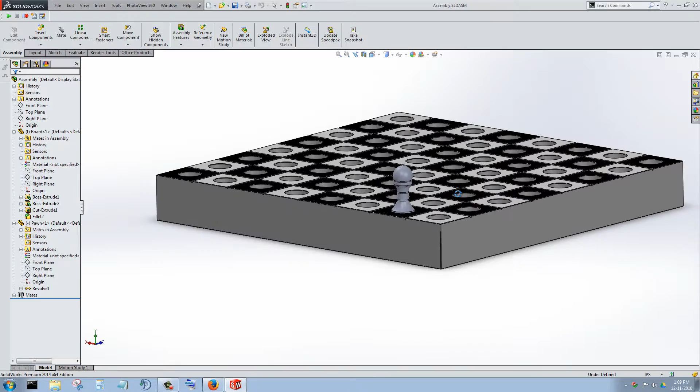Okay, let's make the Rook. Let's open up the assembly. Something I can do to open this pawn up is just right click on that and go into open part. It's a nice shortcut.

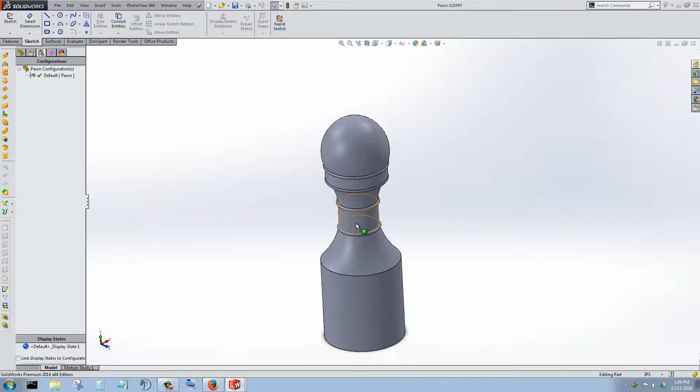As I said before, I'm going to use this pawn as the basis for the Rook. So there's a couple things I can do here. I can create another configuration, and we're not going to do that. I will use configurations of pawns to create the two color tones of the opposing sides, so there will be a white and a black, or brown and light tan, or what have you. Two contrasting colors.

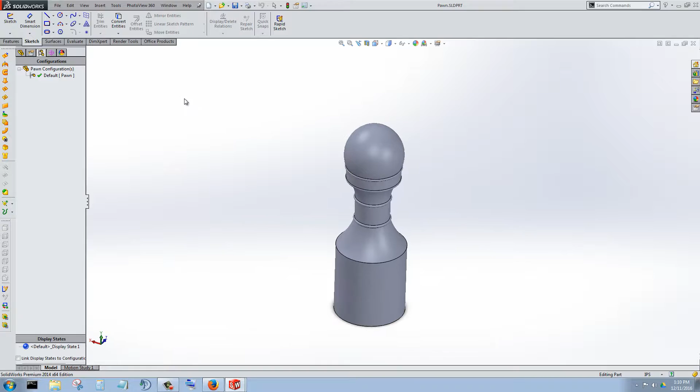But what I will do is simply, because the basics of my Rook is here, go File, Save As, and this is very important to read through these. Every time you do this, if you have this part open in an assembly, it'll give you this option. The first one just saves this part to a new file name, and then the assembly will now reference the new part with the new file name. Don't want to do that.

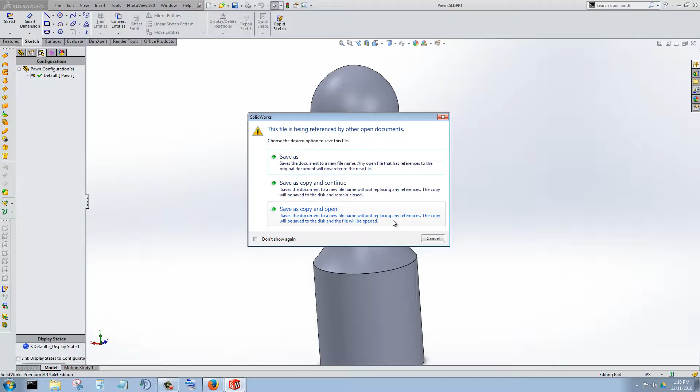Save as a copy and continue will save my pawn as a Rook, but I'll continue to work in the pawn file. Don't want that. We want to save as a copy and open, saving this as a Rook and then opening that Rook file. So save as copy, and we'll call this Rook.

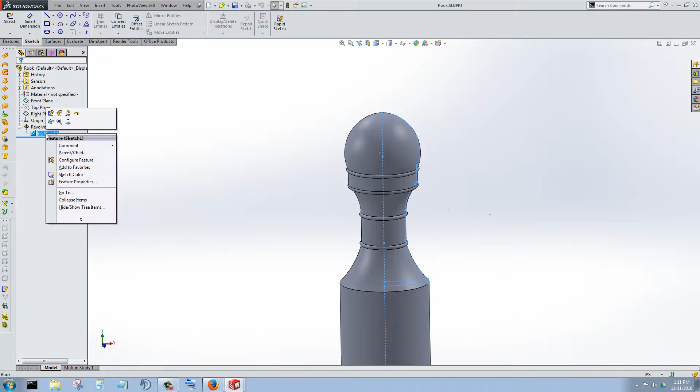Okay, so this is Rook. So I can edit this, and I don't have to worry about this impacting my pawn file. Everything looks just the same as it did on the pawn file. So we'll just edit that sketch.

I know I'm not going to have this arcing head on a Rook, so I'll just sketch out what I think a Rook head might look like, and I might raise the overall height of some of these other geometries, elevating the entire Rook completely, and probably keeping this foot the same distance.

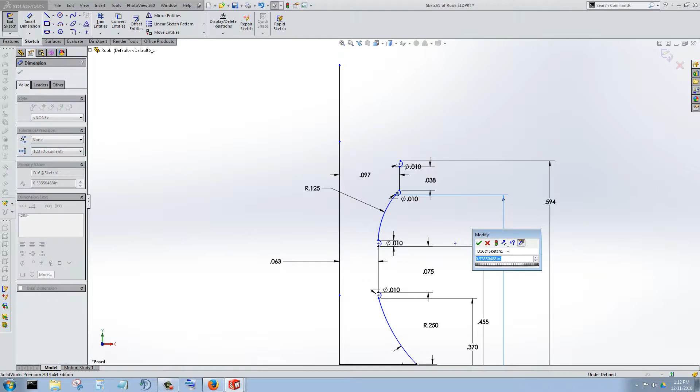Let's see what happens if I take this dimension right here up. I'll just go plus 0.1. It throws the whole thing out of context, of course. Not a problem. And will it do that with this too? Of course it will. So what if I delete that dimension, plus 0.1?

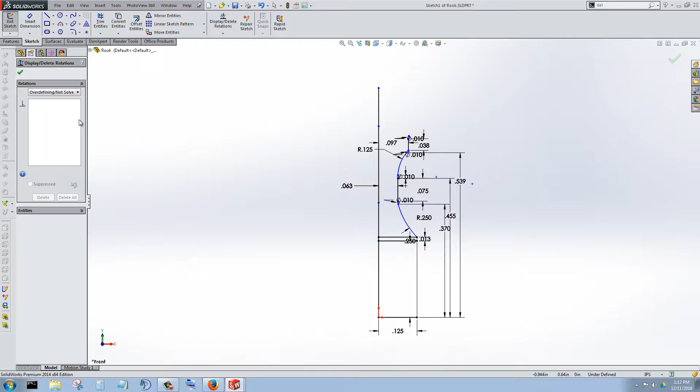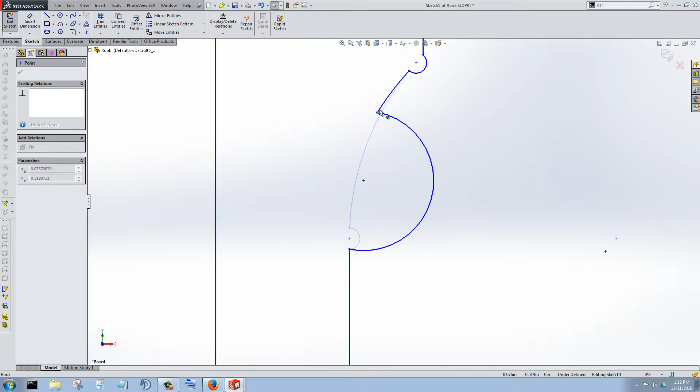Of course. Now I'm going to show you a little trick called Display Delete Relations. Select all of these. Delete all relations. Boom. Alright. Now these geometries exist, but nothing is defining them, so this will make it a lot easier for me to go ahead and edit. You'll even get to the point where I can just drag points. That's how freely we can now alter this sketch.

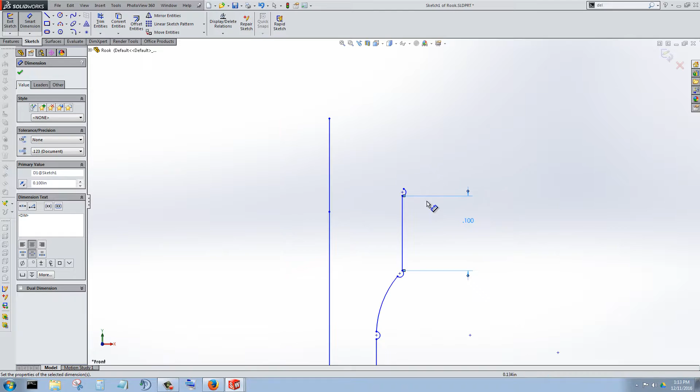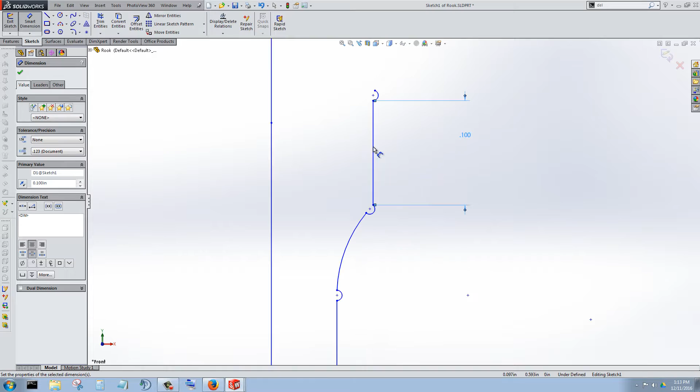Okay, awesome. So let's extend this. Awesome. Let's maybe, well, if we want to keep those three ribs as a commonality between all the pieces, then we should be okay. Yeah, we'll be alright. So let's just finish off the head.

Let's just see what this looks like. Not bad. I'm going to do two things: extend the height of this portion, and then later cut into this portion so we can see the ramparts.

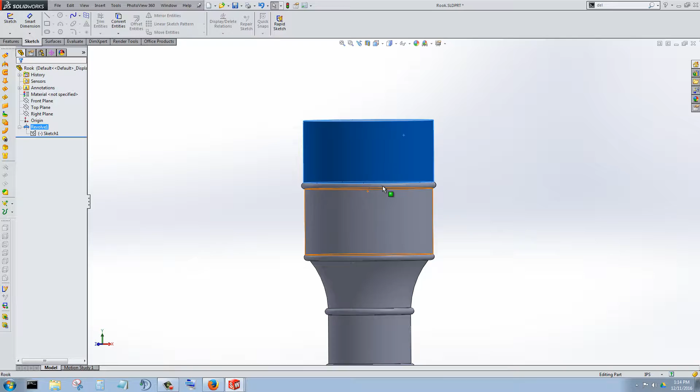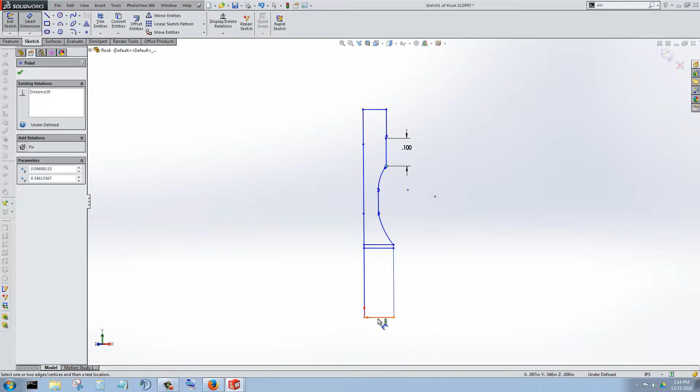So let's do that. Let's extend this. I'm not normal to the sketch right now, but I can still edit it. Okay, we see it went in the opposite direction than what I was really looking for. So I've got a couple things to do here. The best thing to do is probably define this point in relation to this, and then extend this upwards. Perfect. Okay, then we can exit the sketch there.

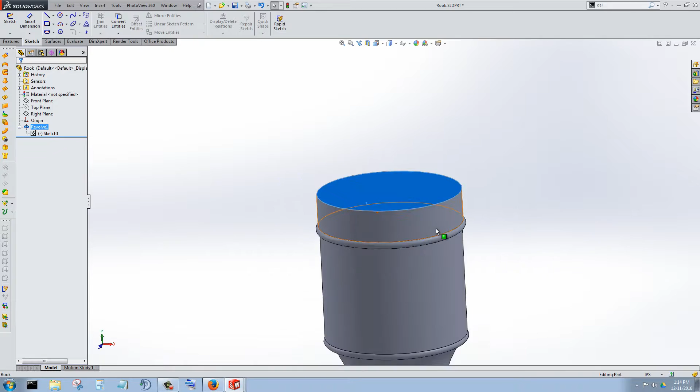Awesome. Now, how am I going to cut away the areas of this that I don't want? I could cut away what I don't want, or I could remove this top completely and build up. Let's attempt to cut away. So I'm going to create a sketch on this surface, and I'm going to go normal to that.

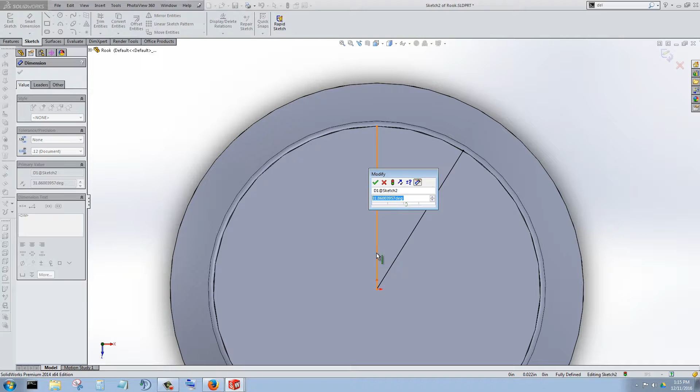Now I think we'll get into some circular sketch patterns. So let's draw an area that we envision cutting out of this. There, and there, and let's make the angle in between this something that divides nicely by 360, an even number. Let's call it 45 degrees.

Okay, and now I don't want a pizza slice out of that. I do want to take out the rest of the inside, but you remember I want to leave something standing here. And this is just visual for now. How about that?

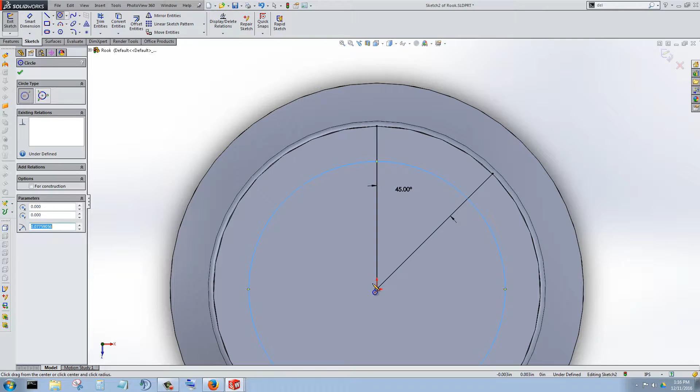Perfect. Okay, now let's do circular sketch pattern. I didn't even need to draw this second line. Let's go ahead and get rid of the second line. I'll explain why. Yes, okay.

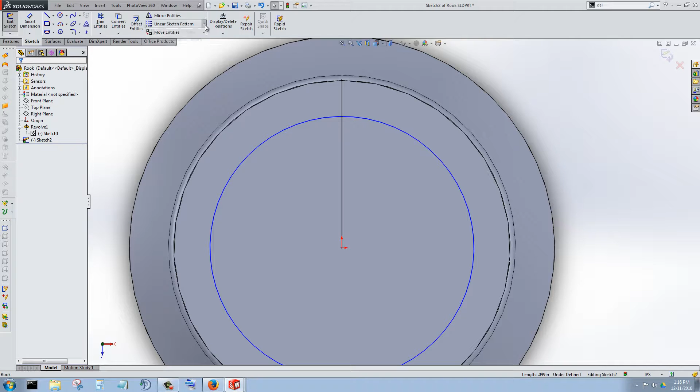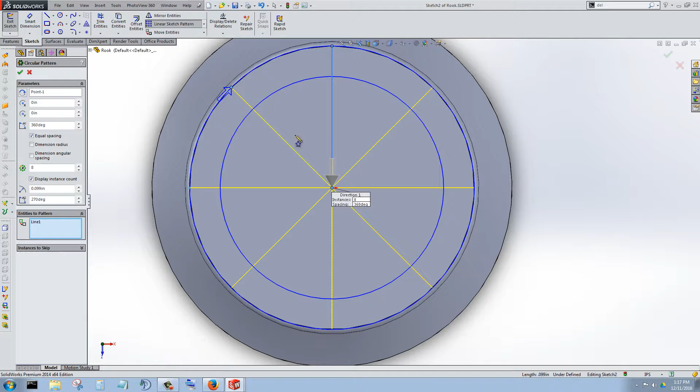Circular sketch pattern. Okay, I hover over this and it says reverse direction. Okay, entities to pattern, that guy. And it already gave me 4, and it'll evenly divide them: 5, 6, 7, 8. Now, if I'm going to cut out every other one, so 1, 2, 3, 4, this turret will have 4 ramparts. Now it'll have 1, 2, 3, 4, 5. That's a nice number. Okay, there's some interesting symmetry going there.

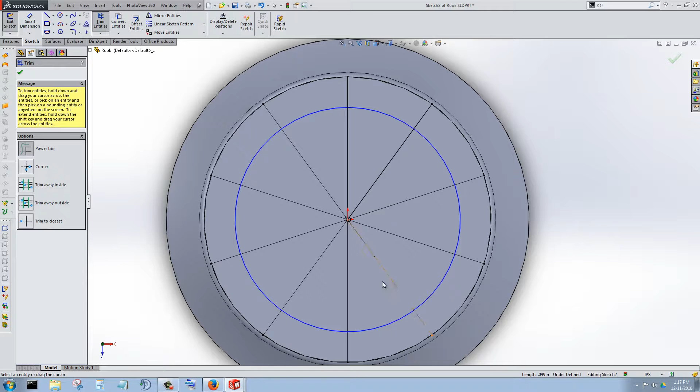So we'll click OK to this. And now I'm going to do some trimming. I'm going to trim away everything that I really am not going to need for this next operation. It's perfect, this is what I need. Now I will select the areas that I'm going to cut. I can go straight into features and go extruded cut, and I'm going to cut that one and then every other one of these.

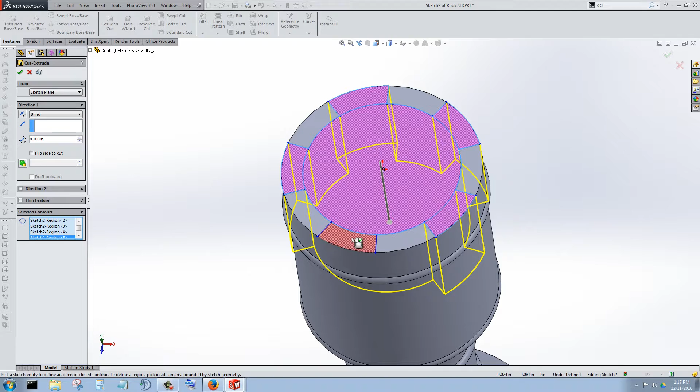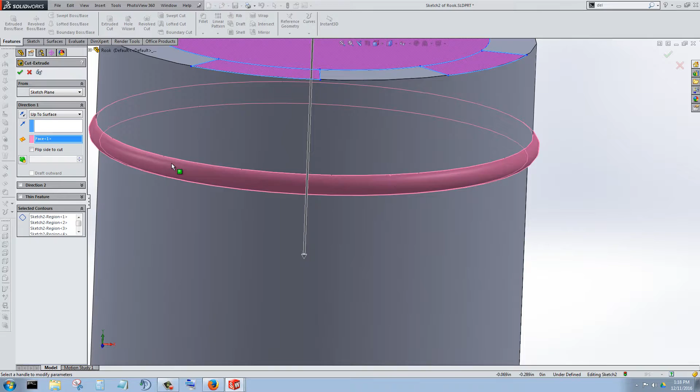Now the last time we cut, we did a blind amount. Blind just means you give me a distance, that's how much I'm going to cut. But let's go up to surface, and then I'm going to select the surface. How about this?

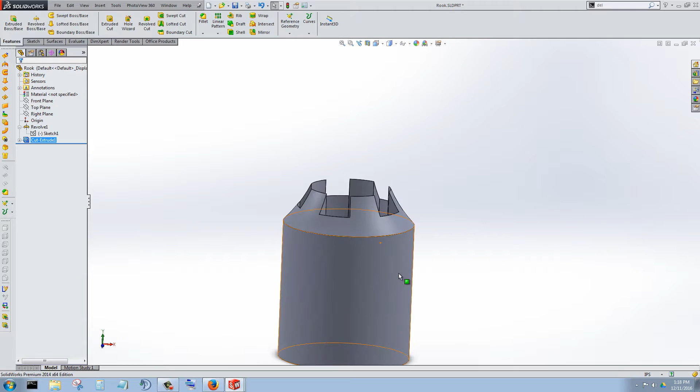That revolve right there. So cut them all the way down to that revolve, and let's just see what happens. It's saying it doesn't like that at all, does it? Let's see where this is going. Click OK. Yeah, that is not a rook. That's some interesting geometry. So it really didn't like that surface input that I gave it.

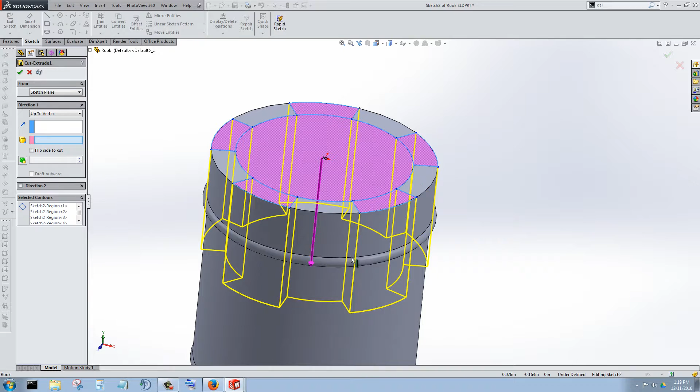And I don't have to undo this. Remember, I just go right into the cut extrude. Nothing's lost. Let's try up to vertex. And the vertex will be that right there. And it's not letting me select it. Okay, now, is there a point on this? There is not. So let's cancel out of this.

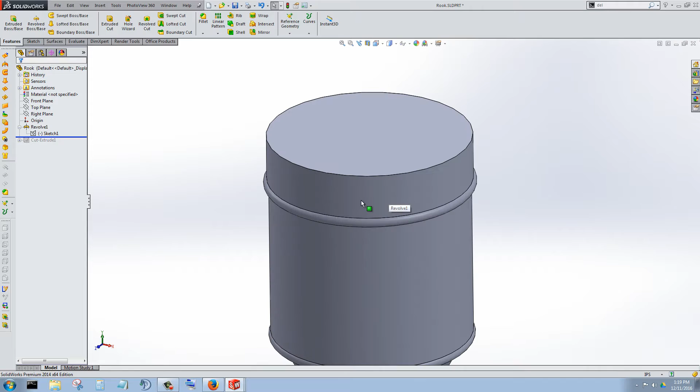And let's insert a plane in the part, okay? So what we're going to do here, this is interesting. This is a rollback feature, okay? It says, I want to go back to a point in time before that cut extrude. And then I want to insert something here at this point in time that will exist before the cut extrude. And in this case, it's going to be reference geometry. It's going to be a plane.

So we need to define this plane, and a circle should define a plane on its own without any other information, and it does perfectly. Awesome. So this message up here says it's fully defined. You cannot create geometry unless it's fully defined. And we're good to go, so we'll just do green check mark there.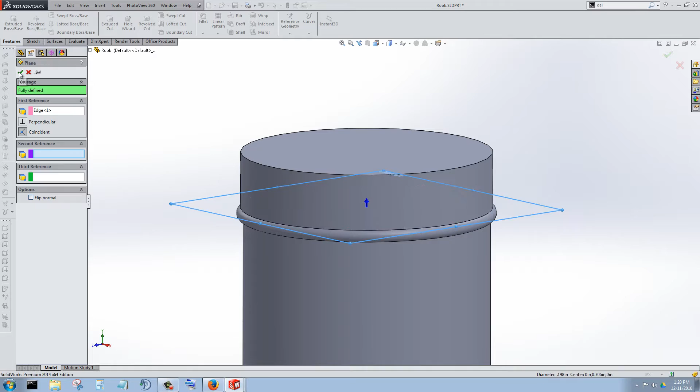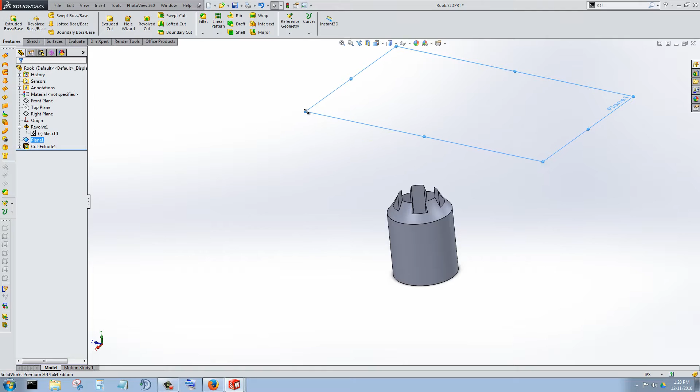And now what I'm going to do is roll it forward, and of course we still have the snafu there, but we have this visible plane, which if you feel like that's too big just visually, I mean the plane stretches on for infinity. So what you're doing here is just changing the visible size reference that defines that plane for you, and that'll make it a little easier. Oh, there we go. Not even. There we go. And we'll be able to. This is doing nothing. It's just for the visual simplicity of what we're trying to work on here.

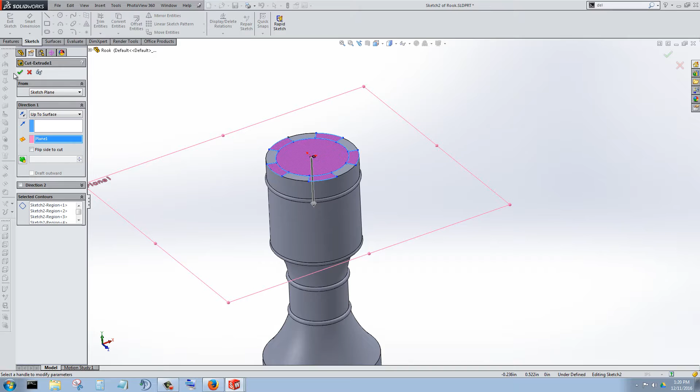So we'll go back to the cut extrude. We'll edit that feature. Now, what I'm going to do is go up to surface, and I'm going to select that plane. And now we should be good to go. Awesome. We are.

Okay, well, I would like to see some sort of height here and here and here and here, maybe up to the midplane of these. So what we're going to do, we're going to go back to this cut extrude. We're going to edit that feature. Actually, no, I'm sorry. We're going to leave that the way it is.

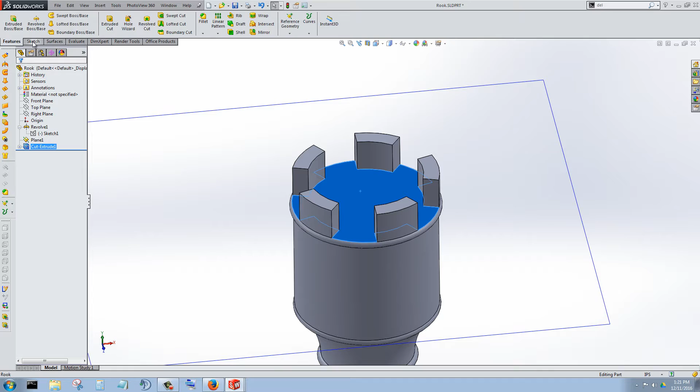And we're going to create another sketch on this plane, and let's go normal to that, and I'm going to draw a circle that I want to take down, and see how it snaps to that. That's the geometry that my previous circle defined, so I know I'm good to go. I lock up to any one of these points, and it's the same exact radius of the previous circle. Go like that, click OK. Don't even need to dimension it.

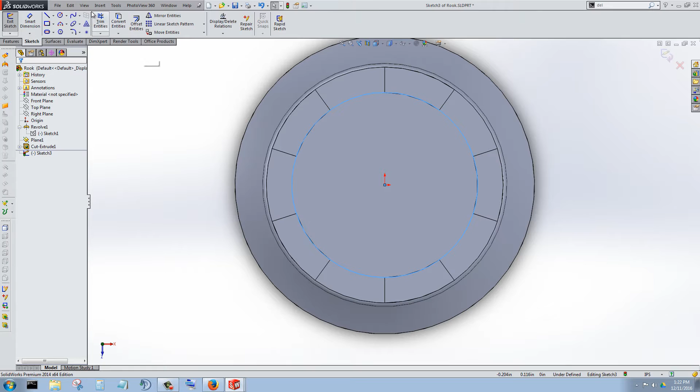It's already defined. It's locked into the side of this rampart. And then I will just go to Features, Extruded Cut. And for this one, I'll go blind. Let's see if this is visually enough for what we're trying to accomplish. Not bad. Not bad at all.

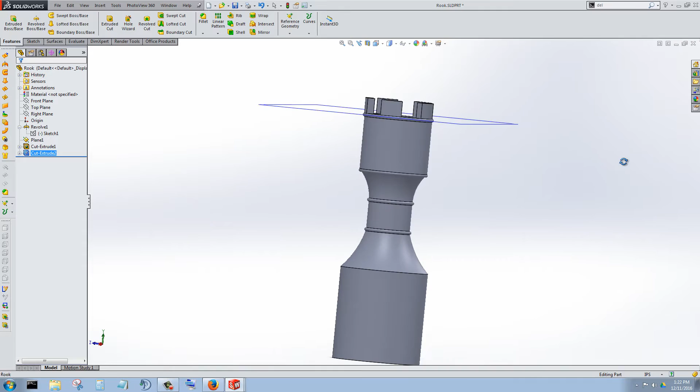So, let's pull this part, and in fact we're 3D printing here. We could put some windows on the side of this. That would be cool, would it not? So we can come in and add those kind of details later in a more advanced session. That would be fun though.

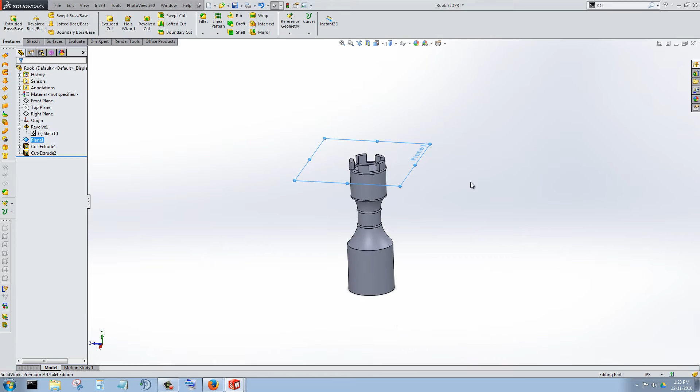And, you know, I don't need to see this plane at all, right? So I'll just go to my visibility, and a lot of these things are by default selected. If I had any reference points or axes or coordinate systems, they would be visible. I don't. I do have planes. I'm going to unclick that, click away, and the plane is now invisible. It still exists, and when I hover over on the left, I can see it, and when I left click, it stays there temporarily until I click away again.

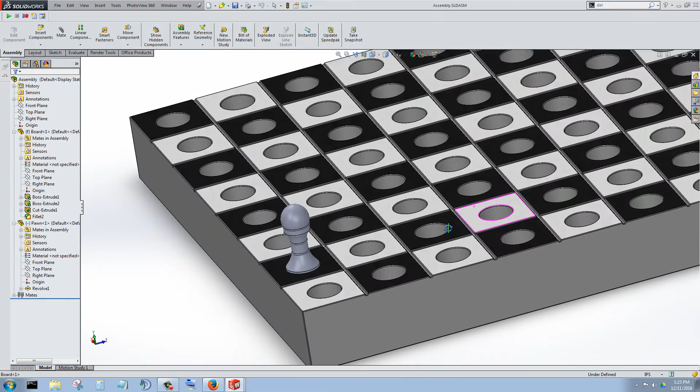Let's bring this into the assembly. Let's save it. Control Tab over to our assembly, and insert components, and let's go a Rook, and here it is.

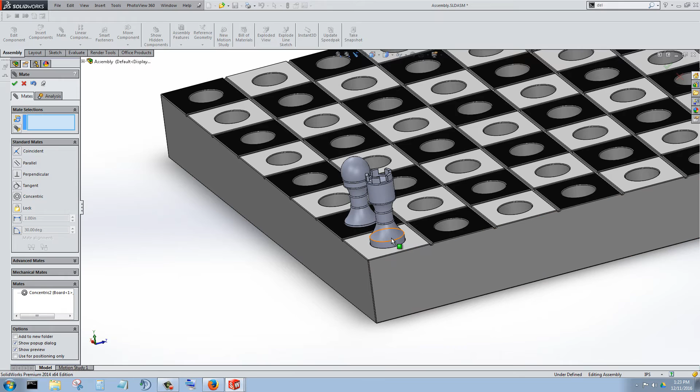Awesome. Let's mate this concentrically. Now look, I won't select concentric. I'll click on the two things I want mated. It's smart enough that, hey, it says, I've got two cylindrical faces. This guy probably wants concentricity, and I do. And then I'll drag this up and select that one, look down here and select that one, and there we go. Things are starting to shape up.

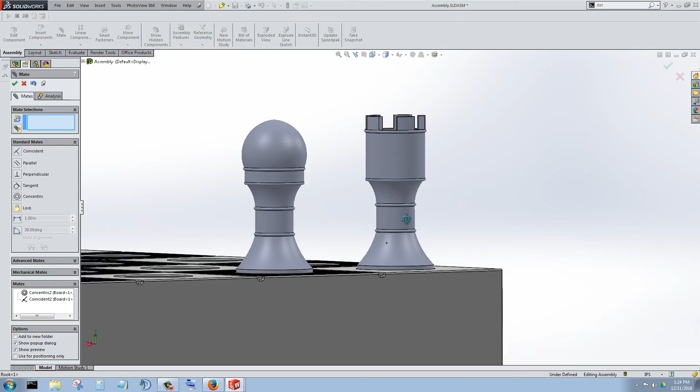I think I talked about wanting some more height out of this Rook, and now I'm pretty sure I do, looking at everything. But what we're going to do on the first pass is just go in and rough out all the pieces, and then we'll put some of the nuances and the finishing touches on. And that'll be easy enough to edit that sketch.

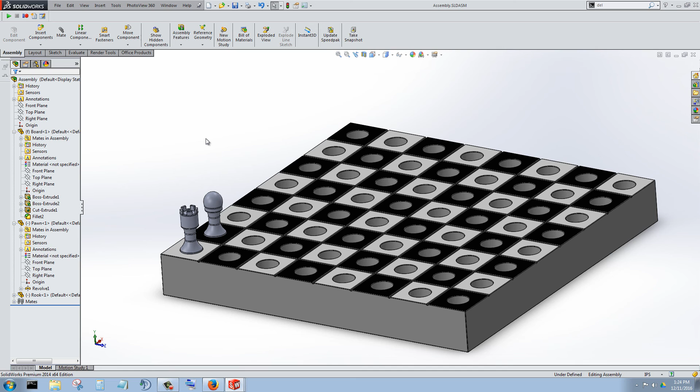So, here we are. And we'll save our assembly. And next time we'll move on to creating a knight. That'll be ambitious. Alright, talk to you next time.